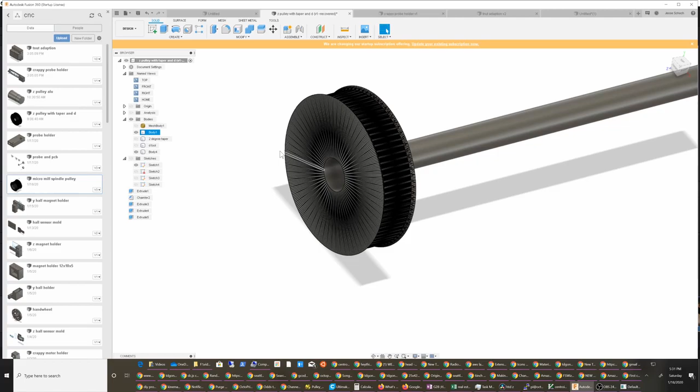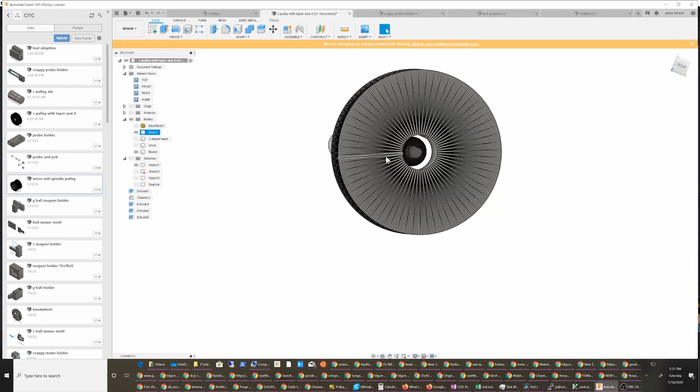So I wanted to quickly show my thinking on this pulley here. Essentially, I only have a 10 millimeter length by quarter-inch D shaft, and I think if I were to try to connect that with plastic and grub screws, there's so much torque that's going to be delivered here, it wouldn't last more than a minute or two. So what I've done here is I've just kind of mocked up the ball screw. It's like a 14 millimeter ball screw, and then you've got this little D shaft on the end.

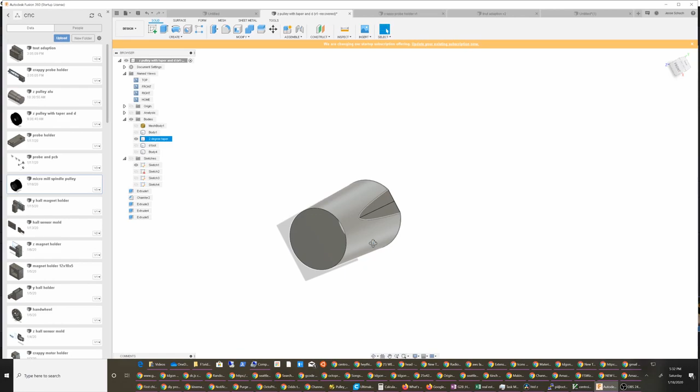Let me hide that real quick. The main component of this is this 2-degree taper with a flat. So I put the flat on here to make sure that any torque that gets delivered isn't going to rely on the friction of the taper. I'm not worried about the friction of the taper to deliver the torque—the flat should deliver the torque, and the taper should hold it in place. Hopefully the flat delivers the torque.

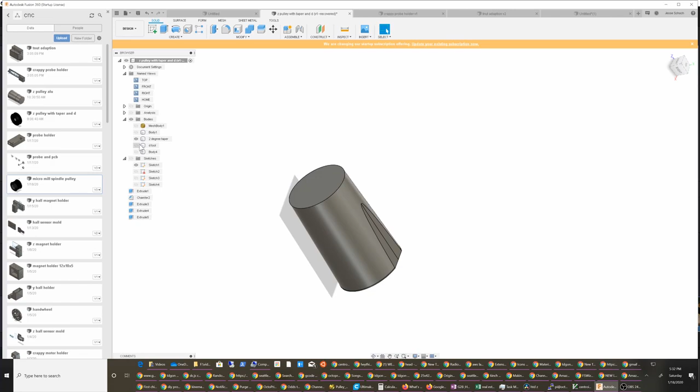Now I thought about making the flat parallel with the taper, but it's only 1 millimeter, and the small end of the diameter is not small enough to taper it all the way down to 1 millimeter. So I'd have to actually make the other part of the body smaller in order to do that, and that didn't work out.

So this is what I ended up with. I've printed out one of these, and to add a little bit of insurance, I'm going to epoxy it together. For the smaller pulley, I'm going for a 4-to-1 ratio, so this is an 80 tooth pulley. I'm going to use a 300 millimeter belt, and then a regular old straight, no-taper connection with a press fit.

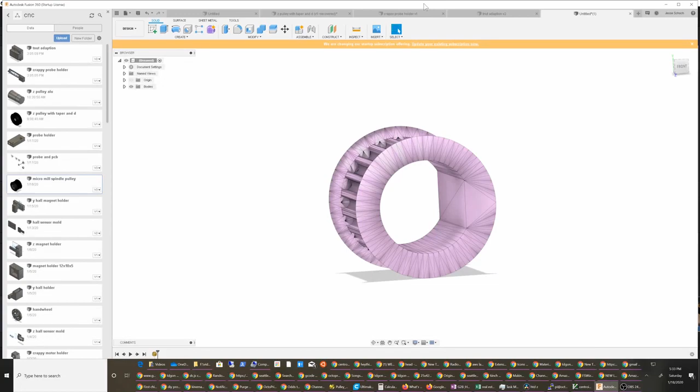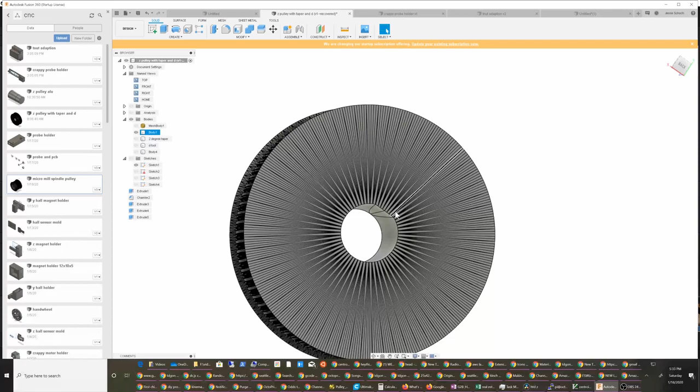I've ordered these 20 tooth pulleys in aluminum from China, but they're going to take anywhere from 2 weeks to a month and a half to get here. So I'm going to make these temporarily, with the hope that I can use this in a more permanent way. If there's teeth wear or problems with the integrity of the printed part, I can always press the core right out and press it into another print, maybe adding more infill or changing the wall thickness. There's a lot of different things I can do to beef this up if I need to.

So right now I'm going for lightweight, but it may be better to go for more structural integrity. I don't know how much load's going to end up going on this. So that's the design, and that's what I'm trying to test out here. I haven't seen anybody do this on a CNC conversion, so hopefully it works out, and somebody else can leverage this flat and the taper to help deliver the torque.

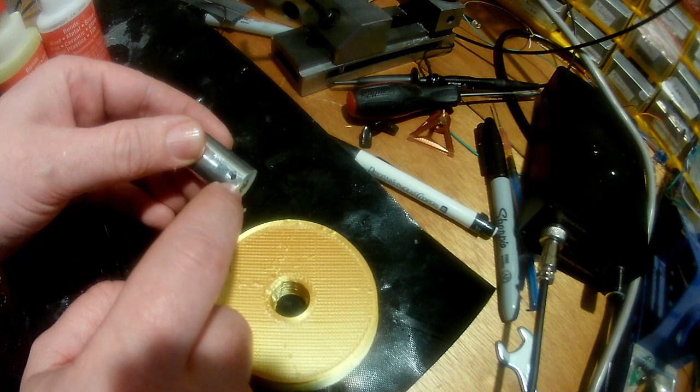So here's my setup. I've got this part that I made—it's got a 2-degree taper on it, and this part will mate to these set screws, which will mate to the 3/4 inch screw on the KR33.

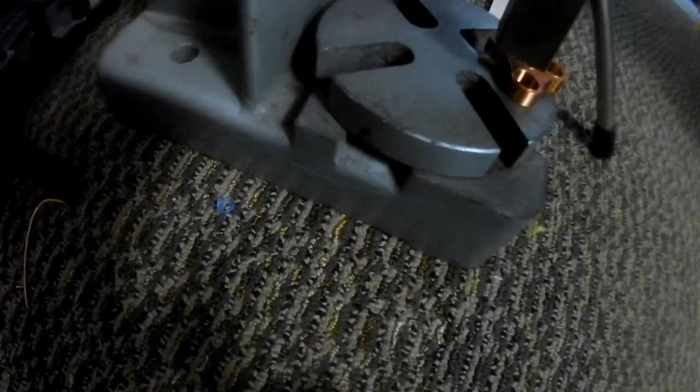That's such a good sound.

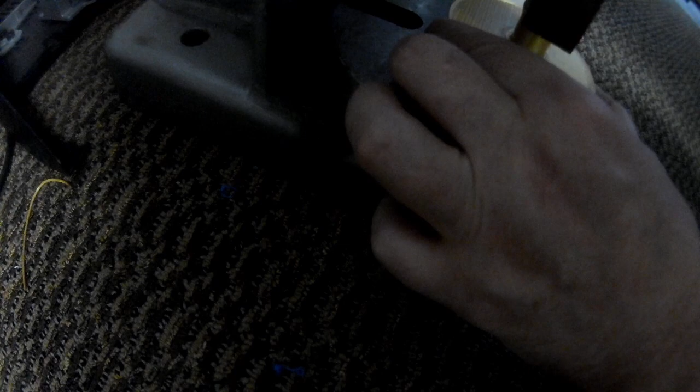Maybe I should have put more infill.

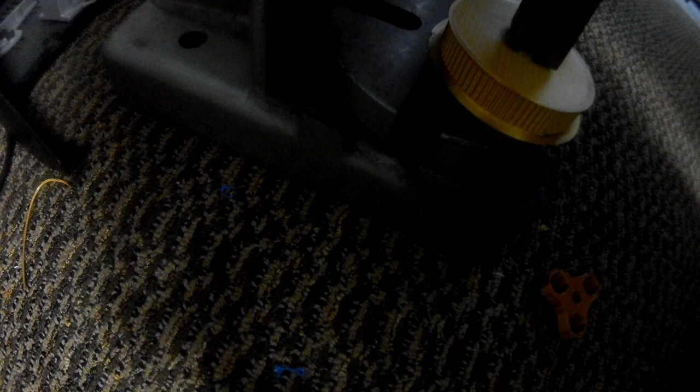That is not what I wanted it to sound like. Oh, tolerances are tricky, aren't they?

Alright. This won't be a perfect test because the other shaft has a D—it's a D shaft.

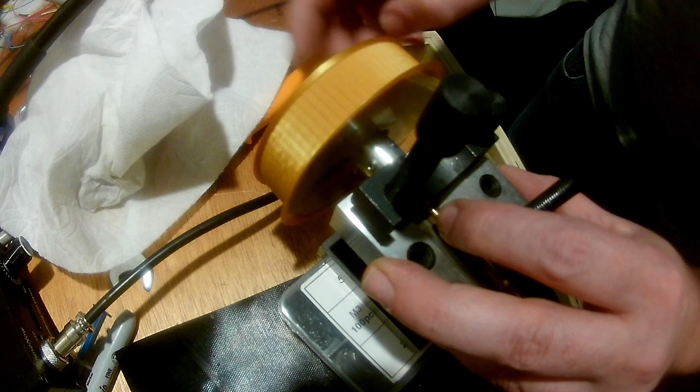Well, actually that doesn't look that bad.

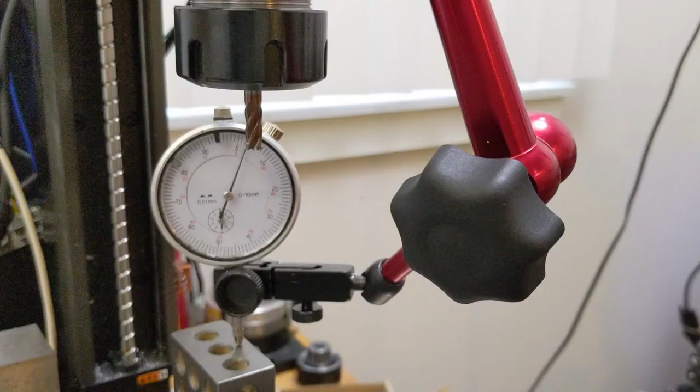Okay, here's the new belt. I've done a quick calibration. This is 1mm steps. Whoops, not like that. Well, I might as well show that because it's so nice and level. Isn't that nice?

Anyway, I don't know if I should go up or down. I think I should go down. There's 1, 2, 3, 4, 5, 6, 7, 8, 9, 10. And I think there's probably some imperfections in the print. Some of those should wear in.

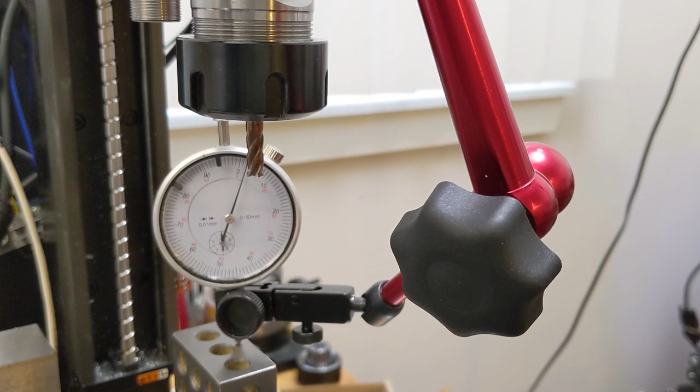All right, I'll go up in 5mm increments. So it's decent—it's not perfect for sure. But I'd say that's not too bad for something that's printed. And I just crashed into the sensor—well, at least my limit switches are working.

So this is the assembly here. They're both press fit, and this one's super glued to the aluminum part, and then this one here I did some epoxy—it was a much tighter press, obviously. I think I'll put that video in because it was such a horrifying sound.

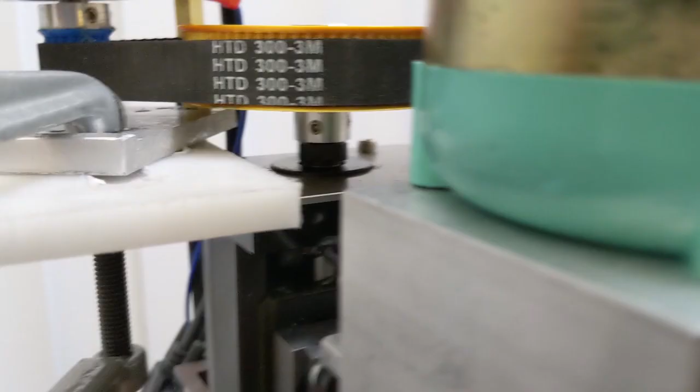So the next thing I'm going to do is run the math on the optimal pulley centers, and then make a plate. Obviously I had to put a little shim in here to test it, so my heights have changed a bit because this belt is 15mm and that GT belt is only 6mm. So I'm going to make the plate the right thickness. You can see here, this isn't even an 1/8 inch thick, and it's steel, which is great.

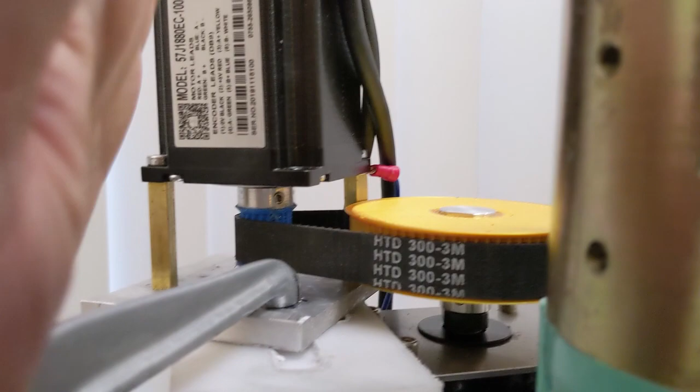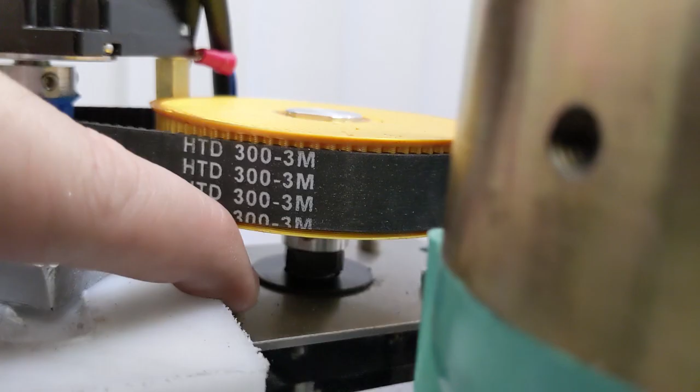But I've noticed that the motor will oscillate a little bit like this, and you can also see this flexing down and up. So what I'm going to do is use these existing mounting holes—whoa—they go into this very beefy steel part that actually holds the retainer nut for the ball screw.

So I'm going to utilize those with a thicker plate, and I think it's about 10 to 12mm. With a 12mm plate, even though it's aluminum, once I anchor the whole thing down to here, that'll work. But in order to do that...

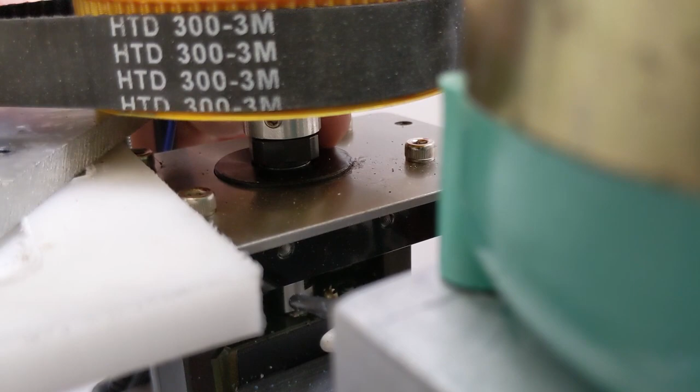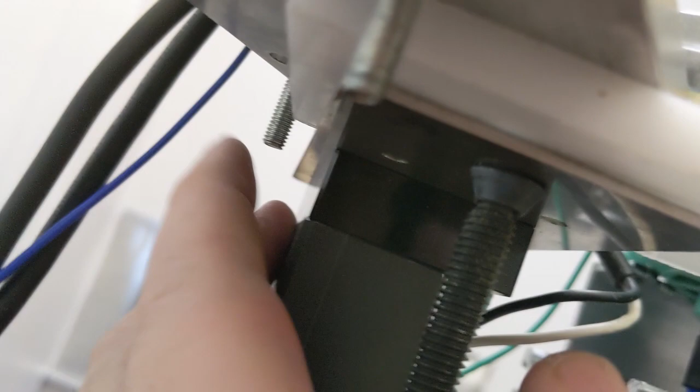I have to have a clearance hole big enough to slip over this thing right here, and also clear the square nut on the ball screw here. So I think this temporary setup works well enough because it's kind of constrained back here with this screw. Maybe it's not that solid. I don't know, I really don't want this thing to crash, so maybe I need to get another clamp on there before I do any more testing.

But I'm hopeful I can get it solid enough that I can machine this part on this mill. So yeah, I think this worked out. It really remains to be seen how well it wears. Generally what I've noticed is the plastic doesn't wear a whole lot in a pulley application, and the plastic does pretty well because this is a compression load, and because of the way it's printed, it's kind of an optimal strength situation for 3D printing.

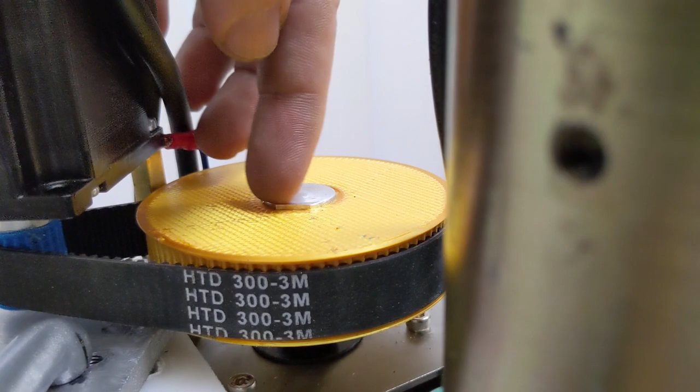And then the fact that I have an aluminum tapered core with a flat on it, that should take out all the backlash from the connection—that was my biggest concern. Now there's only a 1/4 inch by 10 millimeter nub that sticks up here from the ball screw, and that's probably the weakest link in the whole thing right now.